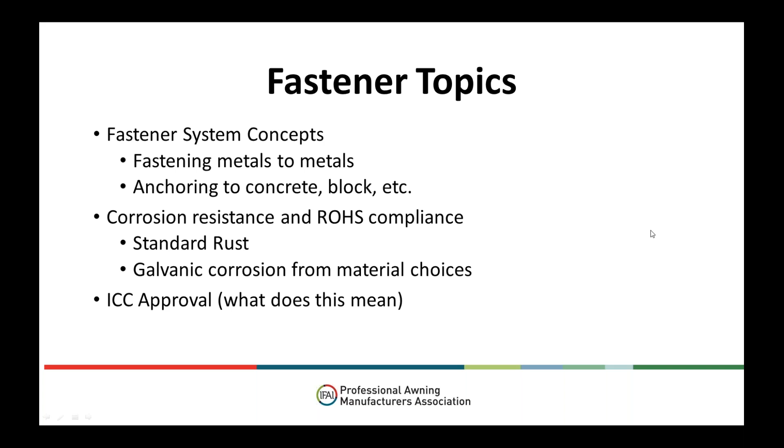As we move to the next screen, we're going to start with your typical nuts, bolts, and screws. I guess the best place to start would be to throw out a description of both. Bolts and screws are a bit different, more than just the name. Generally speaking, bolts are going to be larger, from 1/4 inch in diameter on up to 4 inches, although you probably don't have any awnings that are going to be using a 4-inch diameter bolt.

The screw world is generally smaller, and in the inch world we talk about them as numbers quite often - they're generally a quarter inch on down. So you'll have number 10s and 12s and 8s and other different sizes. So screws are little and bolts are big.

On top of that, most of the time a bolt uses a nut on the backside. You can have tapped holes that bolts go into, but the majority of the time a bolt is going to use a nut, and the majority of the time a screw will not have a nut. There are indeed machine screws that have little machine screw nuts, but most of the screws we'll be talking about today form their own threads.

For example, if you are remodeling the basement and using drywall screws to hang up sheetrock, you don't first drill a hole and then use a tap to put threads into the 2x4 and insert a fastener. You just use a screw that plows its way in and makes its own threads. In some cases you don't even need to drill a hole, but in most cases you'll have a pilot hole of some kind that is created, and the screw will form its own threads into that pilot hole.

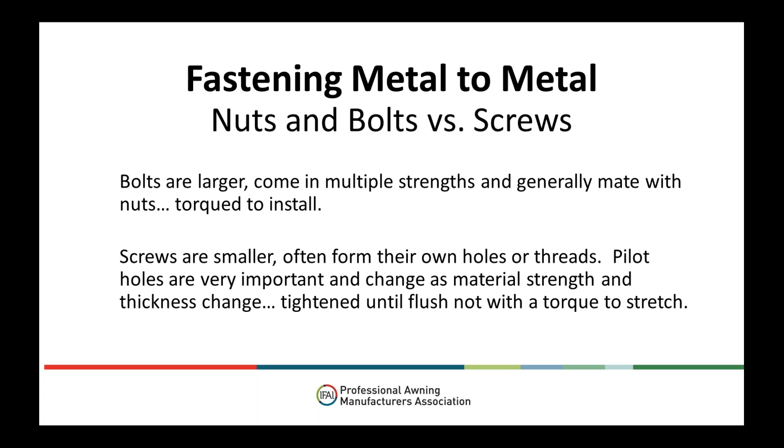Okay, let's move on to the next slide and talk about materials.

In the bolt world, you have a lot of different grades. Probably the most common numbering system is for SAE bolts - there's a standard J429 that talks about how strong bolts are. They have a grade 2, a grade 5, and a grade 8. They're the most common of their grades.

The grade 2 is not heat treated, it's just plain old steel, and it has a tensile strength of about 60,000 pounds per square inch.

When you go to the grade 5, they add a little more carbon into the steel - it doesn't matter to you, but it allows it to be heat treated. Those bolts have a minimum tensile strength of 120,000 psi, so you essentially double the strength of the fastener. Then to the grade 8, which is 150,000 pounds per square inch minimum tensile strength - so you're gaining another 20-25% worth of strength by going from the 5 to the 8.

But there are different strengths, and each strength will be tightened differently because the stronger bolts can take a heavier load. You'll tighten them further and put an increased clamping force on whatever it is that you're bolting together, whatever that bolted joint comprises.

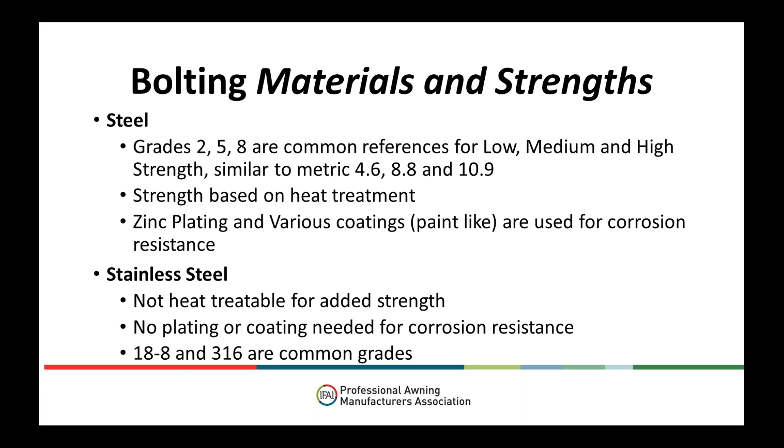Okay, let's move on. This just shows pictures of several types of screws. To confuse you, I put the first one in there that looks an awful lot like a bolt. The true terminology for most bolts is actually a hex cap screw, but the screws you're going to see more often, the machine screw, would be the second option in.

I'd guess you may use lag screws a fair amount, and the lag screw is there really to go into wood. It normally needs a pilot hole, although there is a product in the market called a SPAX screw that does very well without pilot holes, and also going into harder materials. If you go into oak or something like that, it does a wonderful job. It's more expensive, but it does a much better job than a regular lag screw at handling things without holes.

So even though the screw is a little more expensive, you might be able to save some labor time by not having to drill pilot holes. A set screw, a wood screw, and then the last one is a sheet metal screw. Those sheet metal screws are the ones that I'm guessing get used a lot, and there's certainly lots of different head styles.

You can have hex heads and Phillips drives and slotted drives. The slotted is really the one that's hardest to use, but there's Torx and square and other types of bits that you might use to install that.

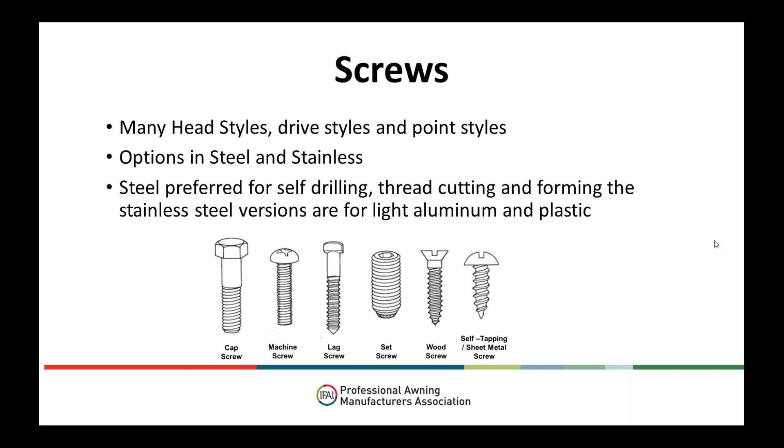Okay, let's move on.

I have in this picture 3 different types of holes that are shown. The hole on the left is tougher to see because it already has the screw installed, but if you look at the left-hand side that says machine screw, at the bottom of the hole you see a couple of extra screw threads. What that's showing is they first drilled a hole, and then after the hole was drilled, we went back and tapped that hole so it had female threads in it to accept the male threads of the screw itself. It's another step in the process - a drill step, a tap step, and then an installation step.

The second one in the middle just has a hole drilled, a pilot hole, and then that case-hardened screw thread cuts. You see a little feature on the end that forms the threads, that little V at the bottom. There's lots of different types of features on the end of screws that will actually cut those threads. One issue with these thread cutting type screws is that they form debris or chips. In this case, I showed those falling to the bottom of the hole, so it doesn't really matter. If there's a through hole scenario, those chips will just go out the other side. In some cases that's not a big deal, but in other cases you may not want chips of metal laying around.

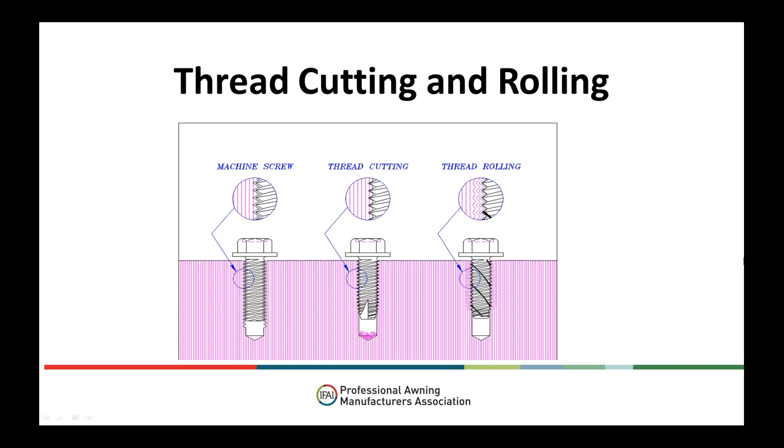Here you see the different types of cutting tips on a lot of these. The regular sheet metal screws will generally have a type A or an AB without a thread feature. You see the B doesn't have the pointy point, it has a blunt point. Then we get into the majority of the next ones - the D, F, G, the BT or BF or 23 on the other side. They all have some feature on the end of it, and those are used to actually form the threads.

At the upper right, I mentioned that Taptite that rolls threads, and that drawing kind of shows how that screw thread form is a cross between - well, if you had a round screw and a triangle screw that got married and had babies, that's what it would look like, that Taptite. Then at the bottom, we've got a self-drilling screw that has a drill point on the bottom of it, and that's probably a real common type of screw that's used in your world.

You have options, whether it's a hex head or other type of head or drive style, but the hex head is by far and away the most common. That drill point is automatically sized so that it drills the right pilot hole for the screw threads to engage, and you have fewer issues with grabbing the wrong drill bit to create a pilot hole. That's a real good advantage. We do see some issues with self-drilling screws.

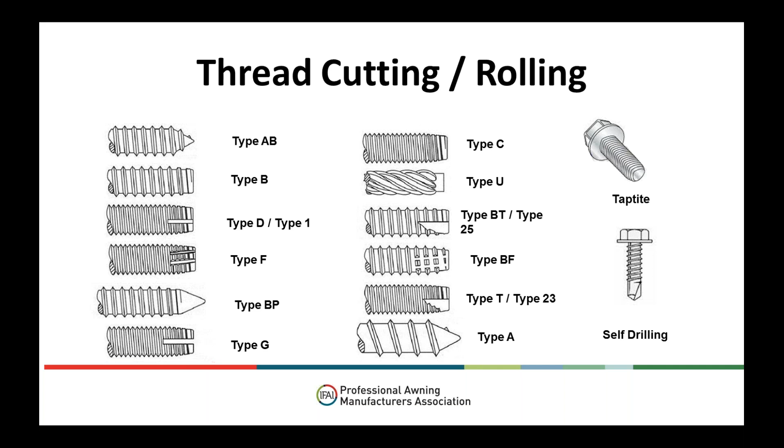Let's move on to corrosion. I don't need to explain the regular type of rust. If you leave a shovel in the backyard and it rains, and you forget about it, and you come back a couple weeks later to continue your project, you're going to have a rusty shovel. That's something we all understand.

There's a different type of corrosion called dissimilar metals, or galvanic corrosion, and that's what I'm showing here. Without getting too far into the details, if you have different types of metals, they have different free electrons, and those electrons want to move from one spot to another if there's a difference in free electron numbers. I'm trying to make this oversimplified. So you get an anode and a cathode, and electrons want to move from an anode to a cathode. On the next screen I show a little table.

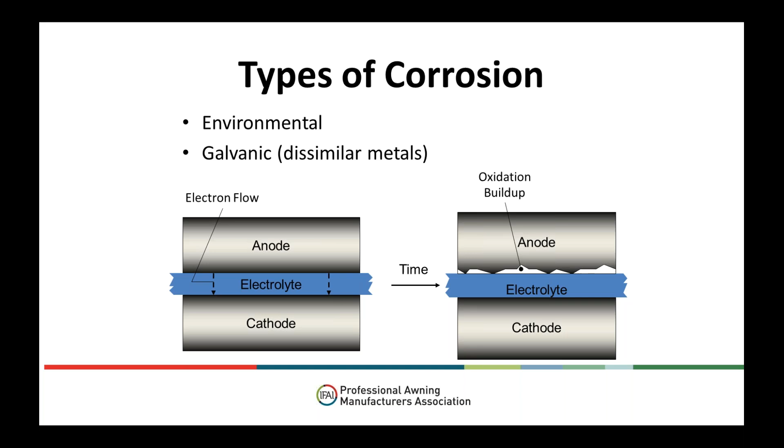Go ahead and skip to the next one. Next slide, please. There you go.

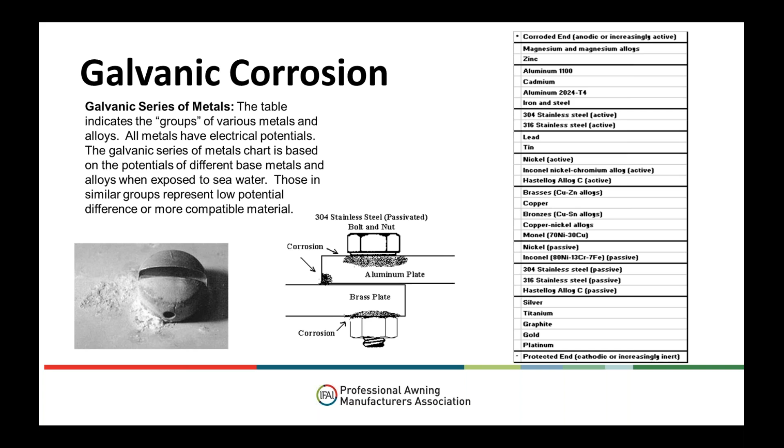So I guess my point is you need to pay attention, because I would imagine you're using quite a few materials that are by themselves corrosion resistant. But when you are putting stainless and aluminum together, sometimes you need to pay attention and be careful, and perhaps isolate the two, or still look at using some type of plating, coating, or a spacer in between there so that you don't get corrosion. Okay, let's move to the next slide.

What do you do to protect parts and keep them from corroding? The most common thing is to electroplate them, and that's done to regular carbon steel parts more than anything. You'll put a clear or a yellow plating on there. For the old timers in the crowd that remember back, they used to use cadmium, and cadmium was pretty good plating. It lasted a long time.

However, they found out that the cadmium caused health issues, and the government told us, I don't know, 30 years ago, that we should stop using cadmium plating because of health issues. It is still available. It's not illegal to use it, and we still sell a fair amount of cadmium plated parts. I guess it's not surprising that our largest user of cadmium plated parts is the same government that tells us not to use it, but that's a separate discussion.

So we went to clear and yellow zinc, and yellow zinc has recently, in the last 10 years or so, maybe a little more, been found to also cause health issues. So slowly that is going away. If you have ever seen the movie Erin Brockovich, that's what that was about. There's something called hexavalent chromium in the yellow coating that makes it better from a plating standpoint than the clear, but it has health issues, not so much for the users. You're fine if you've used a lot of yellow zinc plated parts, but in the plating process itself, with wastewater and issues like that, you started seeing a lot of cancer and things like that. So the yellow zinc is starting to go away.

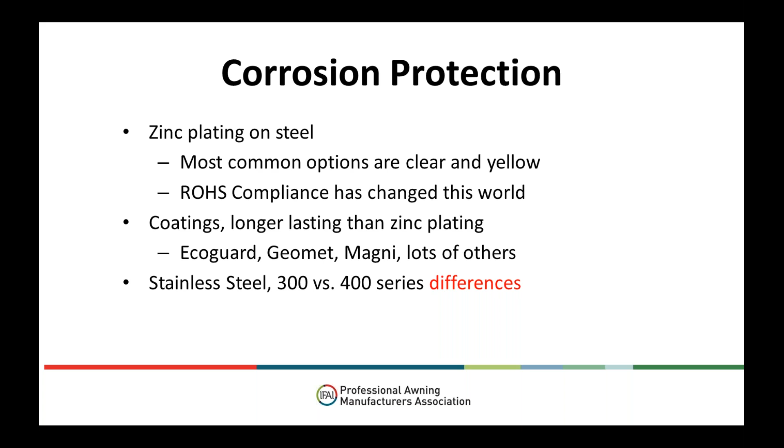So now we're getting generally into the anchor world. I'll talk about this just a little bit, and then I'll let Ben correct all my mistakes. But the ICC codes that you may see, if you're looking at Hilti anchors, for example, Hilti anchors are more expensive. Hilti's a good company. They're a competitor of Fastenal, but we're not here to be a commercial for Fastenal. But whether you're using Fastenal or other suppliers, you have the option of our or our competitors' fasteners. It may be an ITW fastener. It may be a Powers anchor, and then Hilti is kind of its own thing.

Hilti has spent an awful lot of money going through the ICC approval, and that's part of their business plan. They develop an anchor and then they have to have it tested. And the ICC is really a lab process where they verify that the anchor is able to do what they say it's going to do. There's a whole lot of testing involved to get a series of anchors approved or to get the stamp, it's kind of like an underwriter's laboratory concept. But the ICC will put their stamp on it just to validate that those numbers are what the Hilti folks say they are. It costs about $1 million to get a group of parts ICC approved because of all the testing that needs to be done.

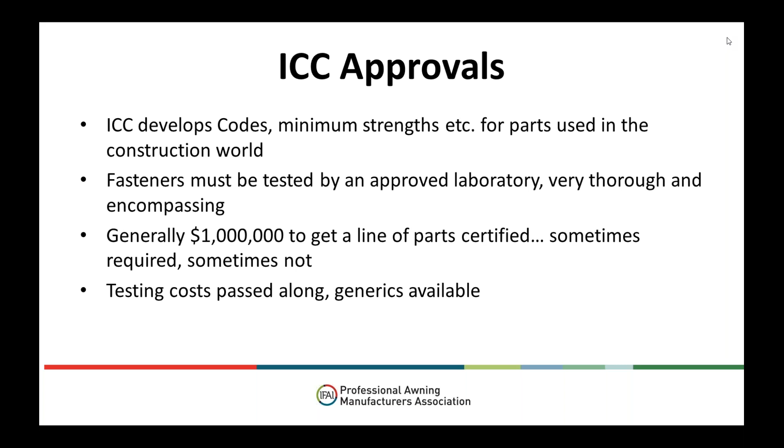So that's why if you look at the Fastenal website, we've got anchors that are the same style, size, and material that cost quite a bit less, but they don't have the ICC stamp on them. With some of our anchors, we're going through the ICC approval process, and with others, we just want an option for people that don't need the paperwork to prove to an inspector that they are what they're supposed to be. That's why an anchor from someone like Hilti is more expensive, and it should be - they have to make up that million dollars they spent, plus margin. Generally, anchors made from the same material, type, and size will do close to the same job, but since we haven't gone through testing on our generic line, we can't claim they're the same strength. That's a decision you'll have to make.

Let's move on to the next slide.

As we move into the anchor world, since that's Ben's area of expertise, I'll let him start talking - there are several different methods to anchor into concrete, block, and other materials, so these are some of the different options. Ben, I'll let you correct any mistakes I made on the ICC end and start talking about the various anchors.

Thanks, Bob, and thanks everyone for joining us today. What Bob said about ICC was pretty much dead on. One thing I'll add is, as with ICC approved screws, they don't want just anyone providing screws for construction, and they don't want just any laboratory being used either. There are all kinds of testing labs across the nation, but ICC will only allow a few of them to actually conduct the testing, and it's a pretty extensive audit they do on the lab to approve them. ICC doesn't just cover approvals for anchors - they cover a whole gamut of things.

For going into concrete, there are two main ICC approvals you may have heard of: ICC approval for uncracked concrete and ICC approval for cracked concrete. The cracked concrete approval is much harder to get, because to meet those standards and pass that testing, anchors are actually installed into cracked concrete and then pulled to the various tests ICC outlines - it's much more demanding on the anchor.

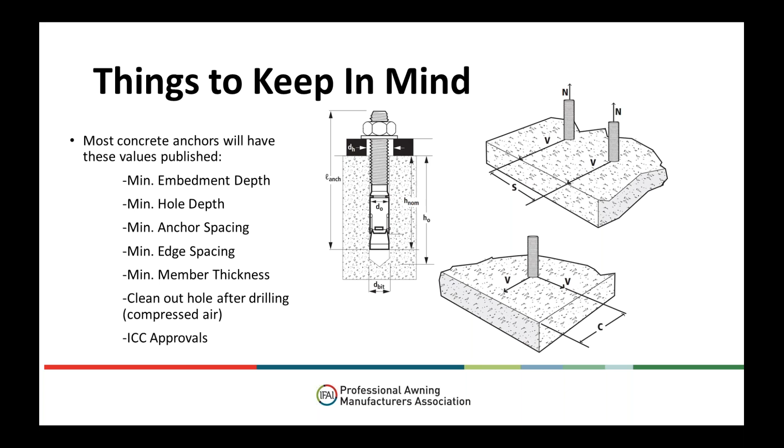These can go into a variety of substrates: concrete, hollow block, whether it's grouted or ungrouted. They can go into brick and even wood. So they're very versatile, with pretty good loading for their size.

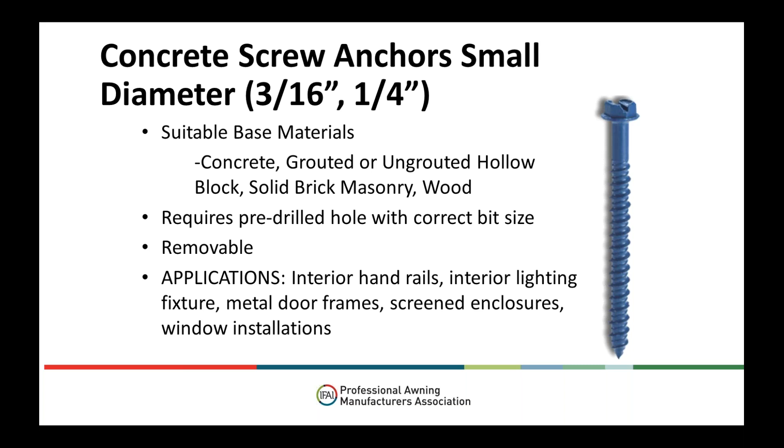Usually you can see the blue coating on this screw. They usually come with a high corrosion resistance coating. Many companies come up with their own names, but ITW uses a blue Climaseal. I forget what Powers calls theirs, but they tend to hold up quite well in outdoor applications where there's going to be a lot of moisture. So we'll go to the next slide, please.

Now we'll look at our large diameter concrete screws. These are kind of the big brother of the small diameter screws. Usually these are in diameters of 3/8 to 3/4 inch. These will carry ICC approvals in uncracked and cracked concrete. I should have mentioned that for the small diameter screws, those usually only carry ICC approval in uncracked concrete. It's hard to get fasteners 1/4 inch and below to pass the cracked concrete specifications, just because when they install that and widen the crack, they just don't hold. So for the large diameter, companies like the big players - Hilti, ITW, Powers - will have ICC approval in both uncracked and cracked concrete.

Just like the small diameter, these require a pre-drilled hole, and then you can just screw it right in. The nice thing about screw anchors is that they're removable. I wouldn't recommend removing it and installing it into the same hole and expecting the same holding power, but it's nice if you're screwing down a temporary structure or you've got to move something - you can just easily unscrew it instead of getting the cutting wheel out. These things are very versatile, you see them used a lot with rack and shelving, holding down the base of those. Typically they don't come in high corrosion resistant coatings or platings, so they're really usually used indoors, but I think a few companies might carry some hot dip galvanized, so you do see them used outside as well.

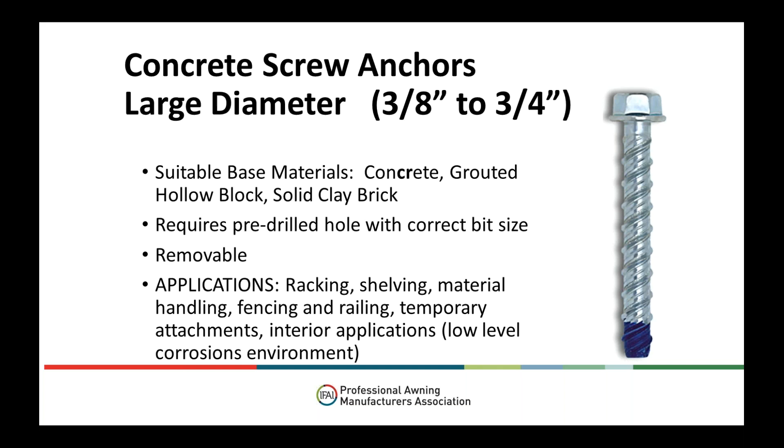Let's go to the wedge anchors. A wedge anchor is a little bit different than your screw anchors. It's the same in that you drill a hole in the concrete, then you pound this down to the embedment depth that you want, and then to get the holding power you tighten the nut, with companies having a certain torque spec you want to tighten that down to. What happens is, you can see in the picture, there's a little clip on the bottom of the anchor right above that tapered section.

As you tighten that nut, you're taking that tapered section of the stud and it is slowly going up into that clip, expanding the clip so that it will press out into the hole. That gives the anchor its holding power. Now, out of all the anchors mentioned today, given the same strength of concrete and same embedment depth, the wedge anchors will give you the most holding power. And in sizes 3/8 and above, these will have ICC approval in uncracked and cracked concrete.

They should really only be used in concrete or grouted hollow block, because they have so much holding power, they need a good firm substrate and won't do well in anything else. If you tried to install this clip into hollow block, you wouldn't have anything to grip onto and it won't work.

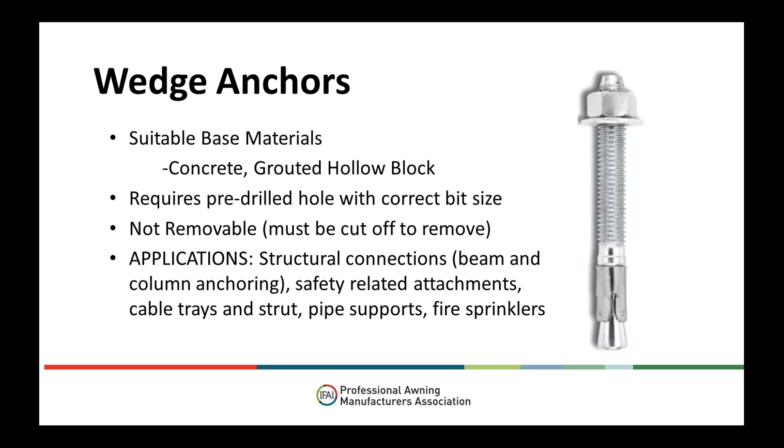But you see it used a lot in rack and shelving, safety related attachments, pipe supports, fire sprinklers, stuff like that. Typically they're used indoors, but they're made in stainless steel, so people do use them outside in some applications. So let's move on to the drop-in anchors.

These are a little bit different animal. If you look at the picture, it's a steel cylinder that has some tabs on the bottom. On the top of the steel cylinder there's an internally tapped hole, usually UNC threads - 1/2 inch 13, 3/8 16, 1/4 20, just machine screw threads like that.

With all the other anchors, you drill a hole in the concrete. You have to be a little more careful making sure you get the correct depth, and blow the hole out with compressed air. You set this in there, then take the setting tool - that long steel piece, kind of bluish on the left - stick it into the top of the drop-in, and pound and hammer. What you're doing is there's a small plug inside the drop-in anchor that starts to get seated down into that tabbed section, and those tabs expand in the hole, giving you your holding power.

These do not carry any ICC approvals, but you will see them with UL and FM approvals because they get used extensively in fire sprinkler applications and suspending conduit and stuff like that. So you see them used a lot overhead. If anybody's ever tried that, it's a pretty physically demanding thing when you have to do a bunch of these overhead, so I've got a lot of respect for the people that do that. These come in carbon steel and stainless steel, and that's about it for those.

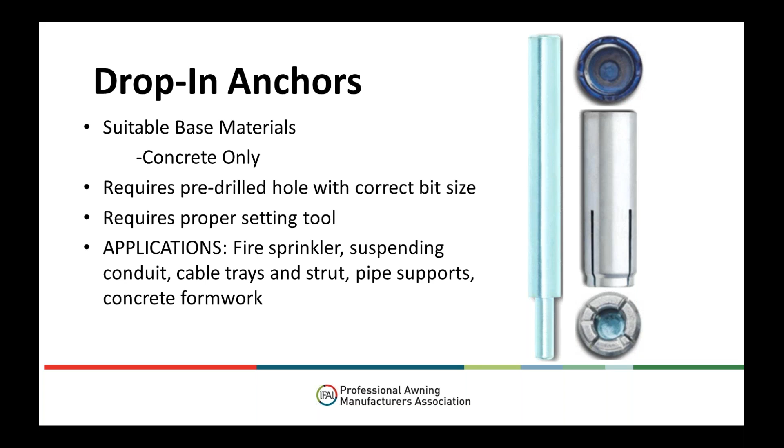Let's go to the next slide, please. Sleeve anchors are pretty much a more light-duty version of the wedge anchor. I should have mentioned the drop-in anchors should only be used in concrete. Sleeve anchors can be used in quite a bit more, kind of like concrete screws - you can do concrete, hollow block, grouted hollow block, brick.

And just like always, you'd drill your hole with the correct size bit, install this in, and then turn the nut, which will then expand that tapered section up into the sleeve, pushing it out into the outer wall and giving it its holding power. These come in a variety of geometries and are pretty versatile things. They come in stainless and carbon steel, so they are pretty useful, but they are lighter duty. They don't carry any ICC approvals.

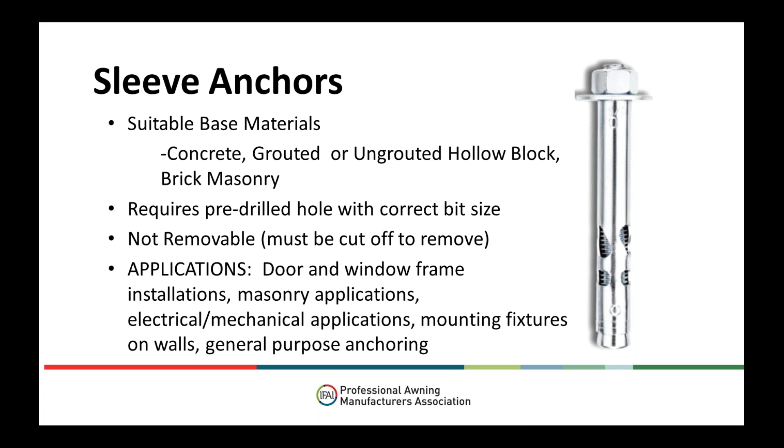So then we'll just touch on the next slide, pin anchors. You've all probably installed one of these a time or two. They can be used in all kinds of substrates - concrete, hollow block, brick masonry, stone. Very easy to install: you drill your hole in the concrete, stick that in over what you're fastening, and then just pound down that pin at the top into the sleeve. And what that does is expand the tabs at the bottom to give it its holding power.

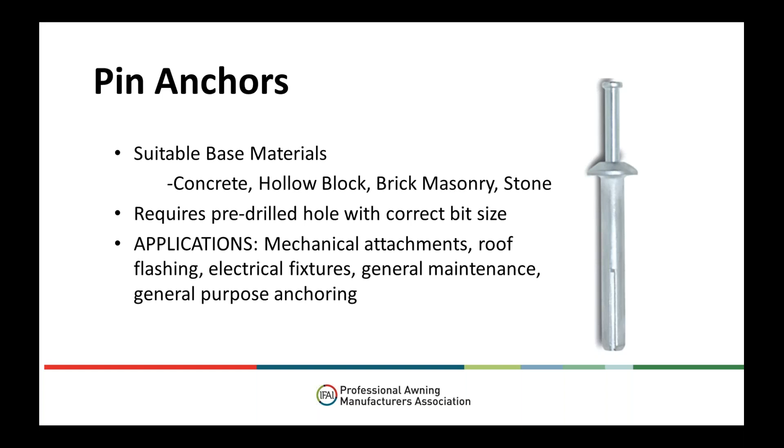Very light duty, no ICC approvals, but can be very useful for fixing things to your concrete, hollow block, stuff like that. For the last one I'll cover - you don't see these used too much, but they can be helpful. They are an expansion type anchor. You drill your hole, stick this in there, and these take lag screws that normally get used in wood. As you screw in that lag screw, it expands the two halves of this thing, pushes it out into the outer wall, and you get your holding power. They can be installed in a number of substrates - concrete, hollow block, brick masonry - but they don't carry any approvals, so pretty much used in light duty applications.

That's pretty much all I had for the mechanical style of anchors. It was just a general light overview. I hope for some of you it might have been a review, but hopefully that was helpful.

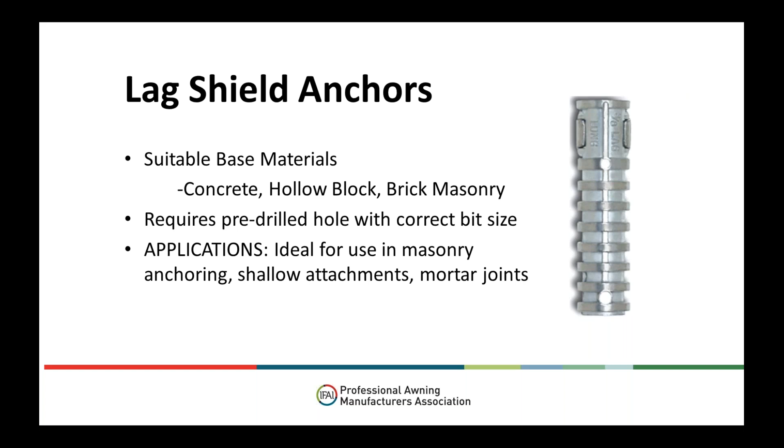We have a few questions that came in during the presentation. Bob, you touched on the SPAX screws. One question was, does anybody use the SPAX lags for retractable awnings? I don't think you guys would know those questions, it was more of a survey to the whole group, and I don't think we can get that poll out. But any thoughts on those SPAX anchors?

I guess they can be used basically wherever you're using regular lag screws, so use them interchangeably. But I would only pay the extra for the SPAX if you don't want to bother drilling the holes first. Then it might be a good cost savings for you.

They're a relatively new product. I guess it's been half a dozen years since I first saw them, though they've probably been around longer than that. They're getting more and more common, and you see them going into the Home Depots, Lowe's, and Menards, used a lot by people around the house, whether it's putting up a wall bracket for your flat screen TV. I think they're getting used more and more in industrial or construction type applications too, and it seems there'd be less stud splitting if we started using those. So that's a great thing to use, I think.